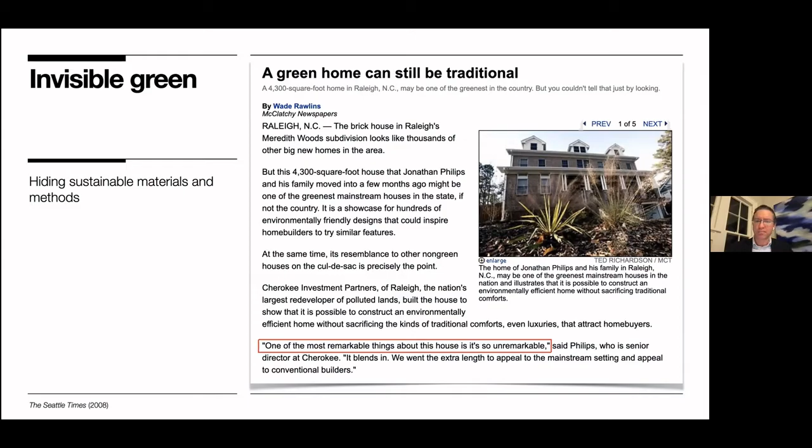Lance Hosey, who is an architect and environmental consultant, has discussed 2 types of green, or a kind of dichotomy, thinking about the expression of green materials. Considerations such as embodied energy, material sources, chemical content, and so forth have become a more familiar agenda to describe what he calls invisible green.

We all work on this project, the invisible green, insofar as it requires a lot of the kind of quantification of sustainable design that might not be evident to users, but also it could include things that are simply hidden from view. Visible green, in contrast—form, shape, and image—can have an even greater impact on conservation and comfort.

So Hosey talks about a kind of image problem in architecture that has made it difficult to make a case for the use of green materials in new ways.

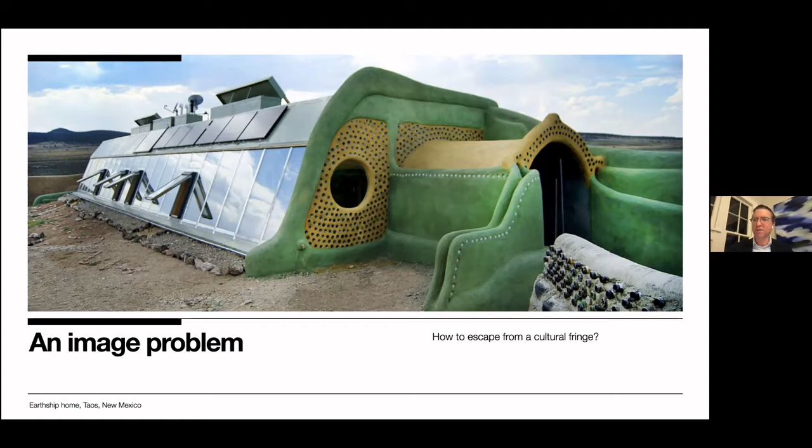I'm showing a kind of so-called Earthship home that is symbolic of some of the work we saw in the United States after the 1973 OPEC oil embargo, when we had an oil shock and crisis, oil became very expensive, and there was a dramatic shift, especially among a fringe of architects at that time, to build houses with tires, not necessarily a mainstream approach from the architectural establishment. For what it's worth, there became a kind of image associated in the 1970s with sustainable architecture that wasn't as appealing to the mass public.

Hosey conducted an interesting experiment based on a 2010 Vanity Fair article. The journal had asked 90 leading architects to pick the greatest buildings of the past 30 years. Hosey, who was at the time writing for Architect magazine, conducted a similar poll for sustainable design—not just greatest buildings, but most sustainable buildings in the past 30 years.

Not one building appeared in the top 20 of both lists, and not a single American architect appeared in both sets of winners. This is the case he was trying to make: that we still have a lot of work to do to associate great buildings or great design with green design and the expression of what that can be.

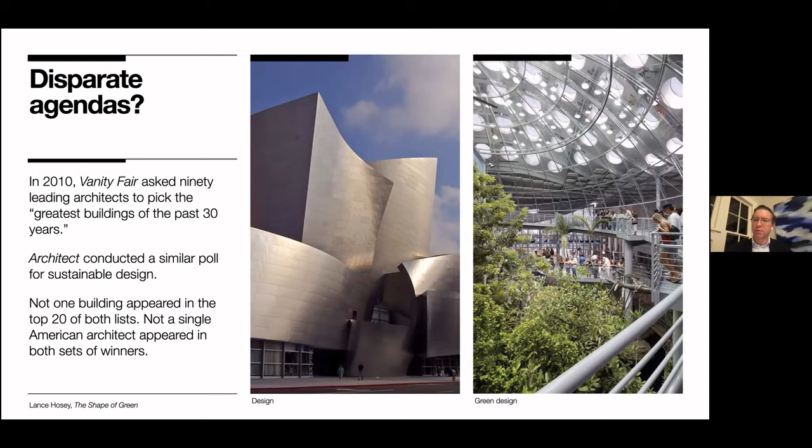In my career, I've been fascinated with new materials. And when I say new, it's not necessarily completely novel—also rediscovered materials and products, even from indigenous cultures that are being rediscovered, re-engineered, or repurposed.

Suffice it to say that in the last few decades, there has been a dramatic increase in the number of available new products, systems, and assemblies for architecture, many of which have incredible environmental performance characteristics. So a lot of the impetus for me of telling a green story has to do with the available offerings in the marketplace or in the laboratory in terms of what green materials can be and do, and the stories they can tell.

So today I will talk about five approaches, just to illustrate several different examples. These are quite varied in nature, representing ways that new materials or new material strategies can be used to tell a sustainable story.

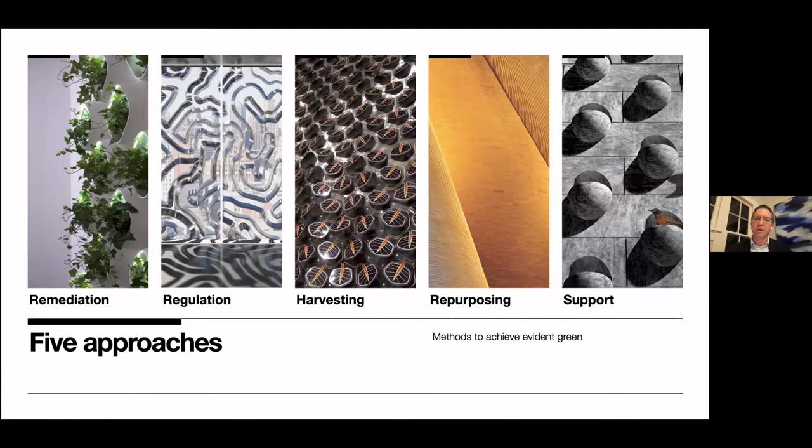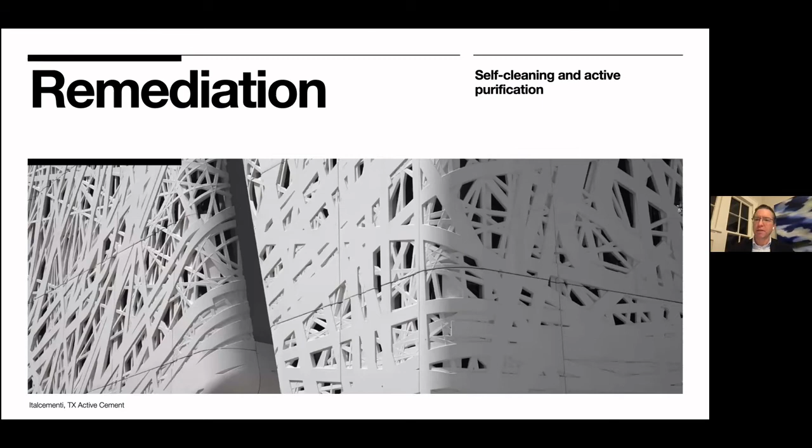I'll start with this strategy of remediation, which is simply put: self-cleaning, or cleaning up the local environment, purifying the local environment.

So why do this? Why would it be green to remediate? Two things, and for each of these topics I'll address the impetus, or the why. The environmental degradation is one—the increase in the amount of smog or air pollution in a lot of cities. If cities can play a role in mitigating that smog, that would be a good thing.

The other reason would be building maintenance. If there are materials—which there are—that can reduce that maintenance, then they would reduce not only human labor but also additional resources required for that maintenance.

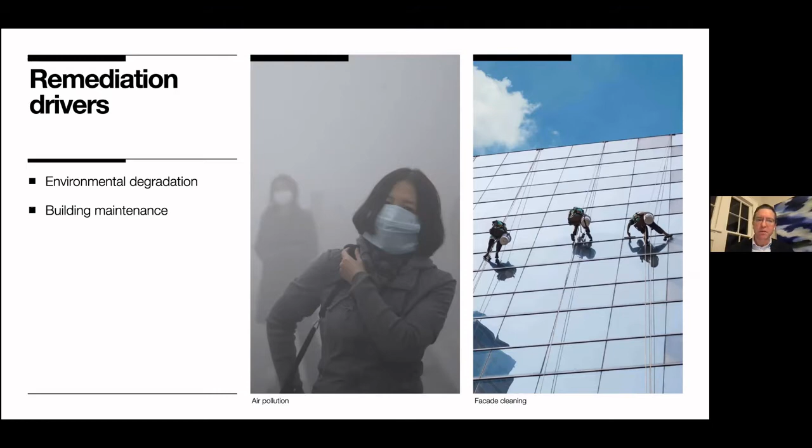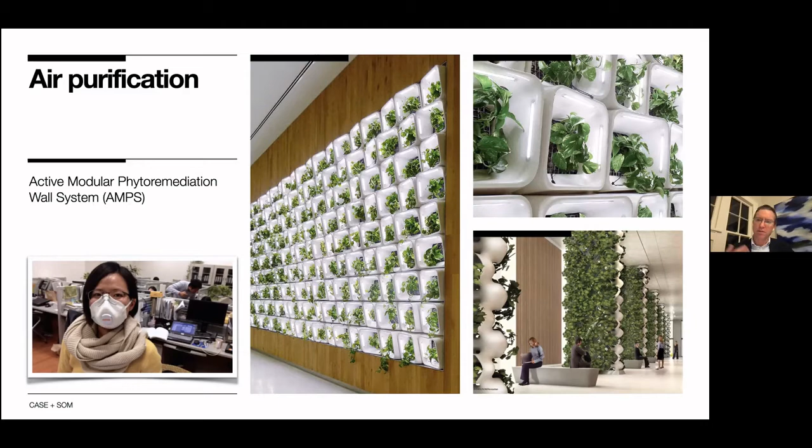On the air pollution and smog side, it's been fascinating to see the number of new systems, many of which are plant assisted. They're essentially living systems, such as this active modular phytoremediation wall system, which uses internal fans in these modules to blow air across exposed plant roots that oxygenate and purify the air for users.

On the cleaning side, the self-maintenance side, a number of new materials and systems—such as this Lotusan paint—have self-cleaning properties based on their surface nanostructure, in this case meant to mimic the structure of a lotus leaf. In the presence of rainwater required to pull dirt off the surface, it can maintain cleanliness even in marshy, dirty conditions.

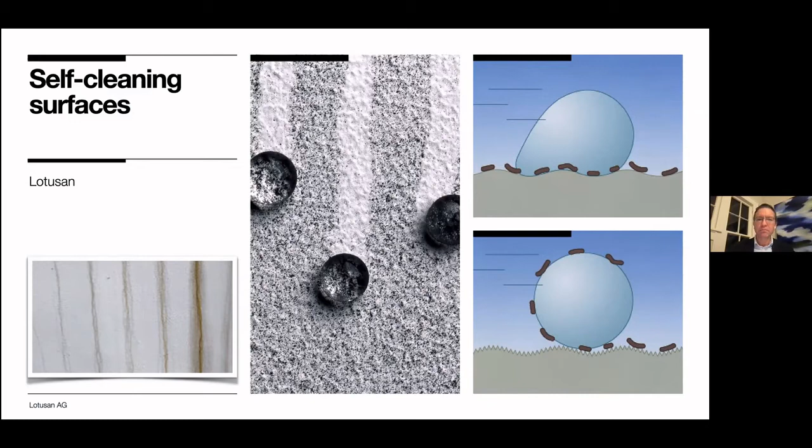Regulation is another topic, and Vivian Loftness, who's a professor at Carnegie Mellon, has used the term 'surfing nature' to describe how we can do a better job of taking advantage of current contextual properties or forces. This is pretty obvious, but solar angles and prevailing winds can help ventilate and condition buildings better simply by being more contextually responsive.

And materials and systems can help us with that as well. So why do that? Pretty obvious answers. One is to be more energy efficient. Another, when it comes to ventilation in particular, is to make buildings healthier.

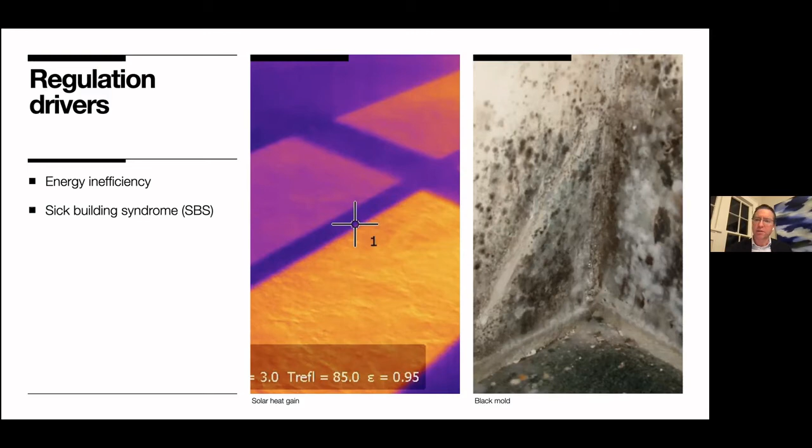This is especially problematic in buildings that have fixed windows—windows that are not operable—and enclosed spaces that never breathe. And of course, with COVID, we know this is even more important to reduce the aerosol transmission of a virus like COVID.

So on the energy efficiency side of things, solar-responsive envelopes of many kinds can play a significant role in helping to reduce solar heat gain in buildings.

This is just one example of a smart material: an electroactive polymer-based window shade system designed by Decker Yeadon. The configuration resembles a cellular structure, or muscle fibers, or something like that. You can see the general response indicated in the sample in the lower right, where these blinds automatically open and close with a very small amount of electrical input that can be tuned to solar angles.

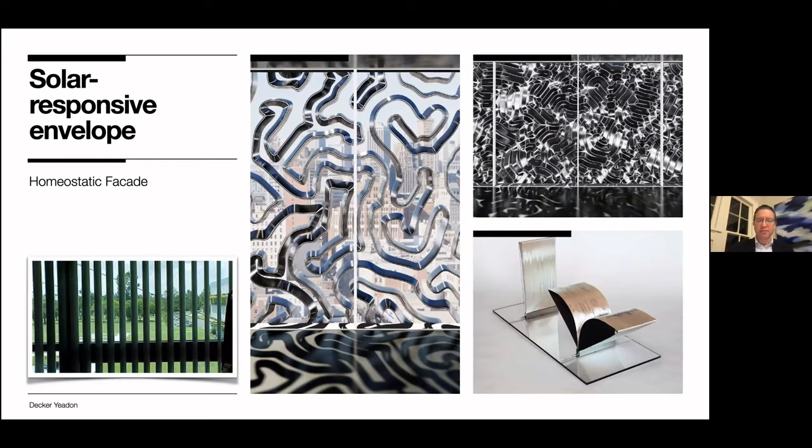I should mention too, in each of these examples, I'm showing a kind of conventional representation at the lower left of the circumstance—in this case, a typical blind that's not smart, used in the lower left.

Similarly, with this smart ceiling system, I'm showing a conventional 'dumb' ceiling on the lower left. This Stratus project is a smart interior surface, and it's a ventilating ceiling. It does a number of things as an integrated design, as a system.

This ceiling does have acoustic baffles. It has integral lighting and ventilation. It has smart sensors that detect the presence of human occupants, where they are, and what their temperature is, providing illumination as needed, as well as ventilation as needed.

And I think this is just a great illustration of what an integrated assembly can look like, as opposed to many of our assemblies in the built environment, which are composed of a number of different types of products and trades that don't really speak to one another—similar to a lot of conventional commercial ceilings, which have many different functions but aren't well integrated like this ceiling.

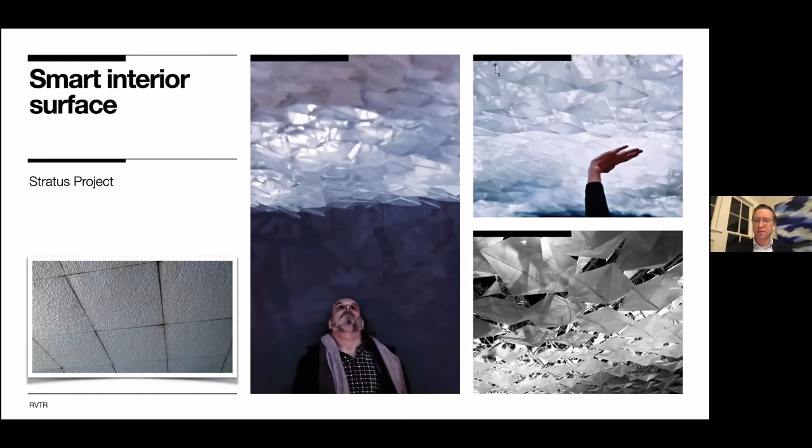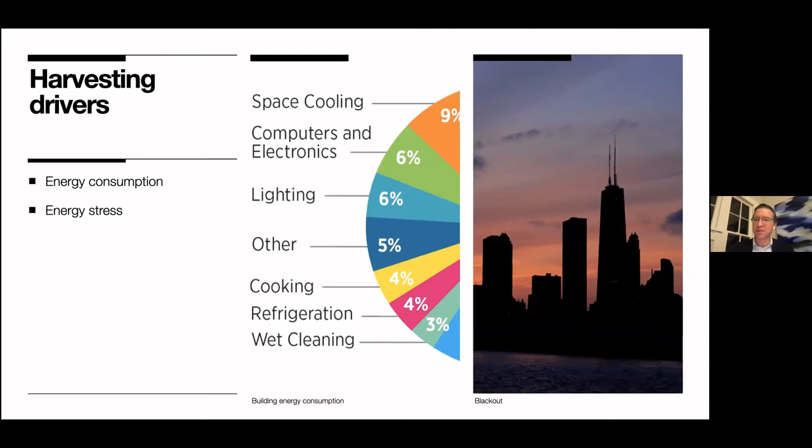Another strategy is harvesting, similar to surfing: nature's harvesting of renewable sources of energy. This is pretty obvious why we should do this, because buildings consume so much energy, as well as to avoid problems with the energy grid. In the United States, our energy grid continues to age, becoming more obsolete and insecure. We do have blackouts not infrequently, which is alarming, but luckily nothing too long in recent years. So renewable energy can and should play a larger role in helping our grid be more reliable, distributing the responsibility and capability of harnessing energy with individual buildings.

This is one example, trying to show some less conventional approaches people have seen. This wind harnessing facade, a parking garage in Nagoya, Japan, by Inaba Electric Works, uses vertical axis wind turbines. I appreciate that they're painted different colors and surfaces so they accentuate the movement, like an art piece that constantly moves in the city. This wind harnessing facade powers the lighting in the shopping mall next door. I think this is a great marriage of art and science, and more aesthetically pleasing than a typical parking garage.

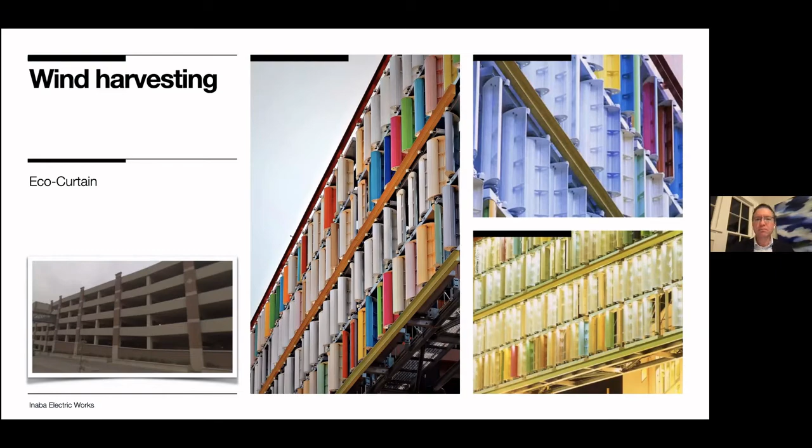This is a whimsical kind of solar power called Grow that looks like a cartoon of ivy or leaves. There's a reason these leaves are three-dimensional: in addition to the thin film photovoltaic harnessing solar energy, piezoelectric components also harness wind energy, so that when the leaves flap, they harness wind energy as well. This is compared to the typical installation you see in the picture down below.

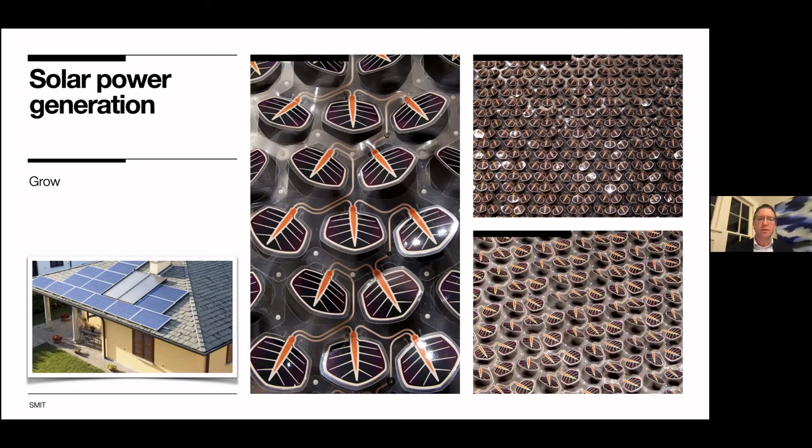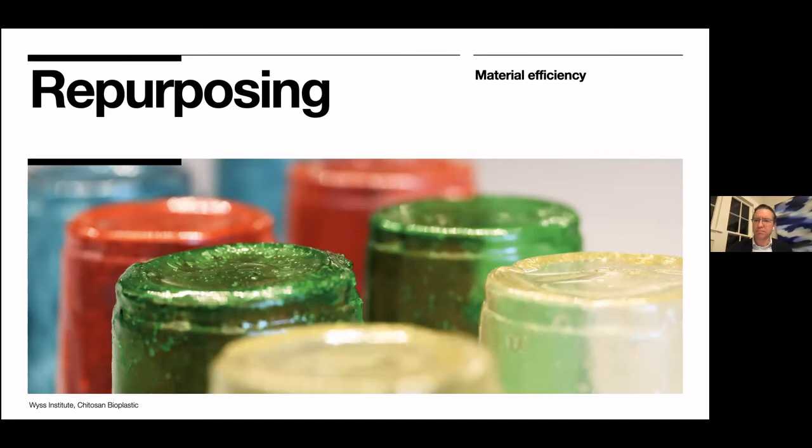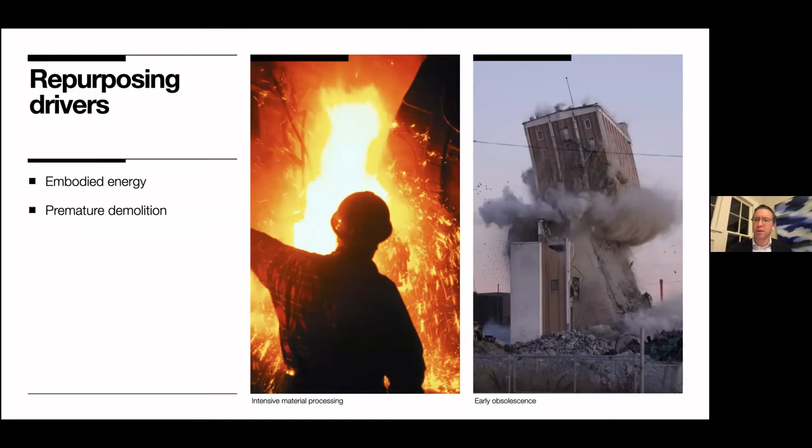Repurposing, as discussed in the last topic thinking through circular economy strategies, is a very important way to take advantage of first life materials and second lives. We would do this for obvious reasons: there's a lot of embodied energy and carbon in materials, and also a lot of buildings are demolished prematurely, and we need to take advantage of those materials for new uses.

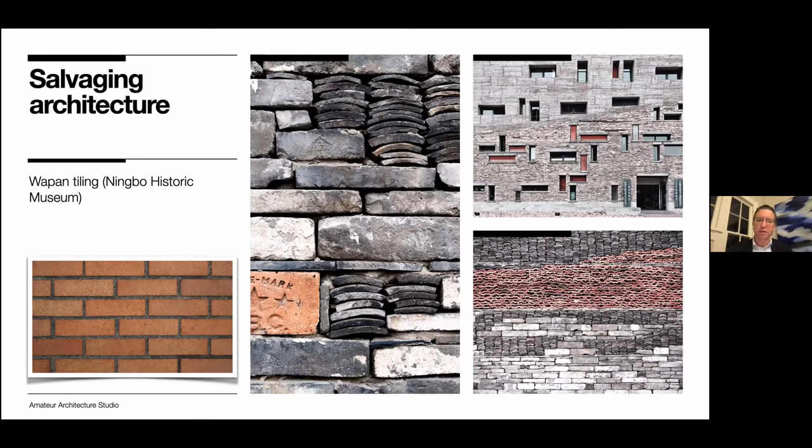I've been very fascinated with strategies like this by Amateur Architecture Studio to reuse salvage building materials in new ways that were not at first expected, such as roof tiles and pavers and all kinds of other components into new building facades to tell a story, a kind of palimpsest of past architecture. And to create new materials with, in this case, agricultural waste, using wheat board to create new kinds of tile that have embodied carbon and perform a lot better than conventional ceramic tile environmentally.

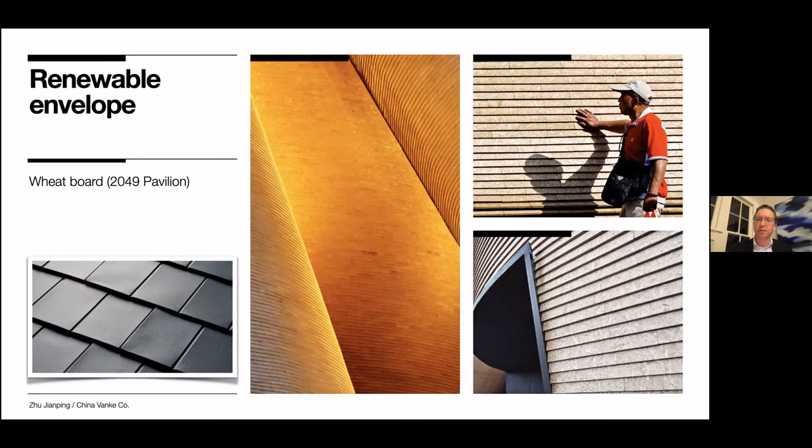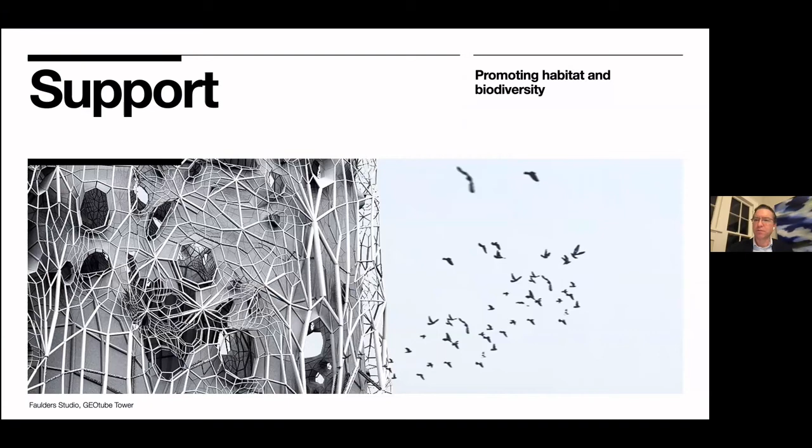In this strategy called support, we're looking at supporting habitat not just for humans, but for other species. Why we would do this is to try to curtail the rapid biodiversity loss that we're seeing in the world that human development is causing, and also to remove obstructions, or at least provide new supports for migrating species.

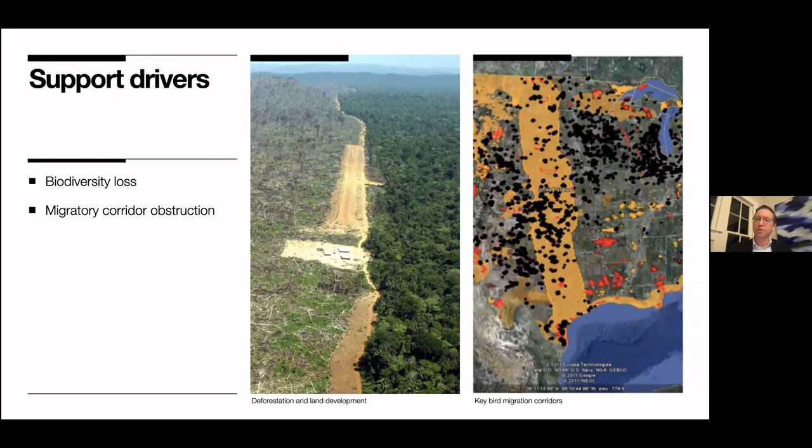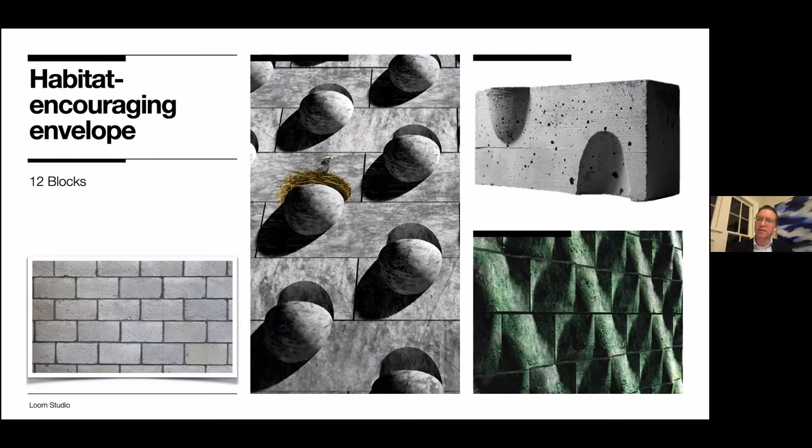I really appreciate this project by Loom Studio that re-envisioned conventional concrete masonry units to provide habitat opportunities for birds, nests, or different types of lichen and moss growth. This project by the Polytechnic University of Catalonia is similar in that this biological concrete is developed with the intent to support growth for these plants, as well as the small insect and bird species that they would support.

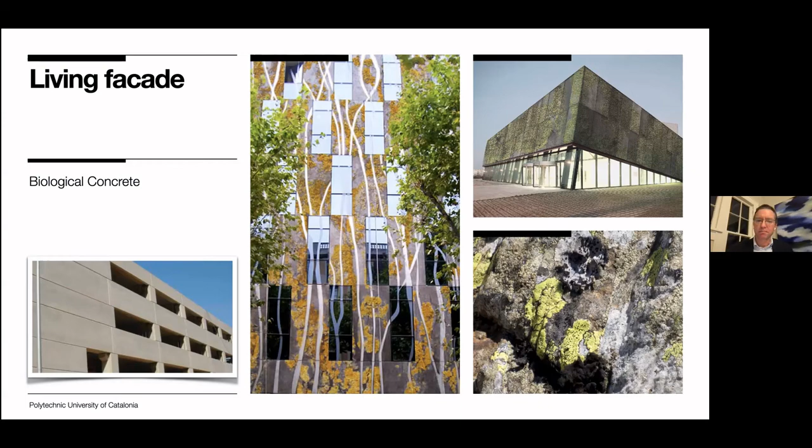So those are just a number of, I find, fascinating strategies to represent green ideas and green performance in architecture.

Just a few thoughts to conclude: throughout the history of architecture and different traditions, there are monuments that represent our canon, many of which have technological or material innovations embodied in those monuments, whether it's the tallest wood structure in the world in Todaiji, or building tall with stone in the case of Gothic cathedrals, or skyscrapers. Of course, these are all about size, but in many different ways. Thinking of material innovations, these types of monuments are ones we point to as a human society to say these are moments of human achievement.

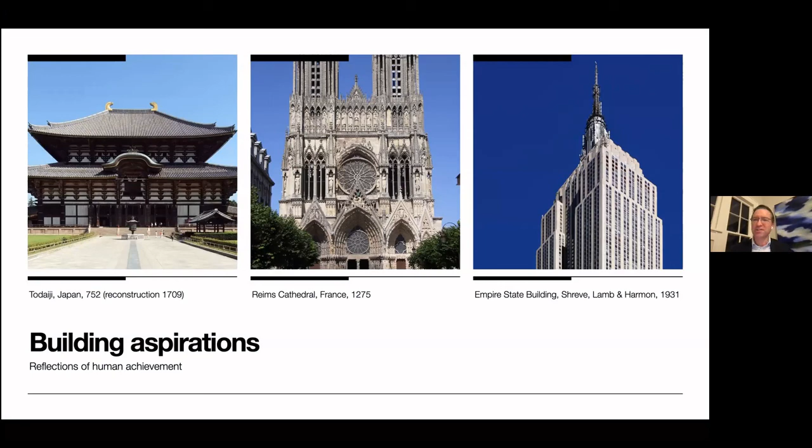So a question is, can we do this? And we should do this in terms of environmental performance as a form of achievement. In other industries, there's a marketing component to this. Tesla markets its own version of green design, and people see Teslas or Prius or various products that have a kind of conspicuous marketing dimension, whether they're truly green in every way or not. Architecture hasn't quite had the same type of market power yet in terms of what that could look like.

When we look at natural systems, in terms of the embodiment of natural technologies and design, nature is what I call unapologetically radical, in terms of its form and its expression of its performance. It is quite beautiful, stunning, awe-inspiring. And architecture should be no less so in terms of environmental performance.

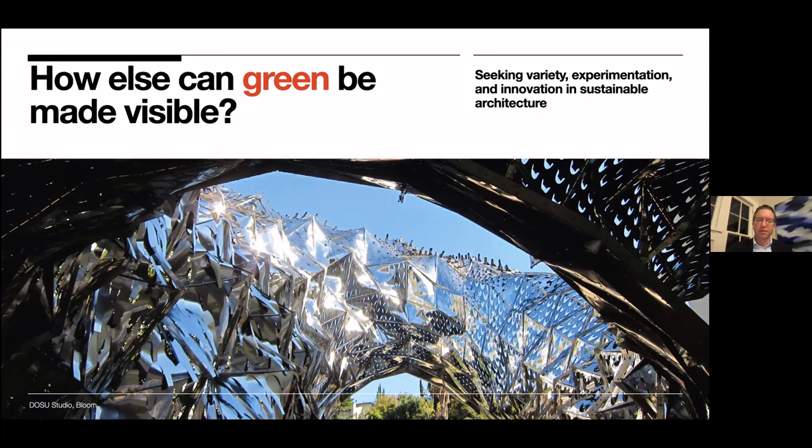So a concluding question is really how else can or should green be made visible in architecture? As I've shown today, I don't believe there's any one style or one way that this can or should happen. It's really a question for architects and the larger design community to consider these different methods and how we should move forward. So I will stop sharing my screen.